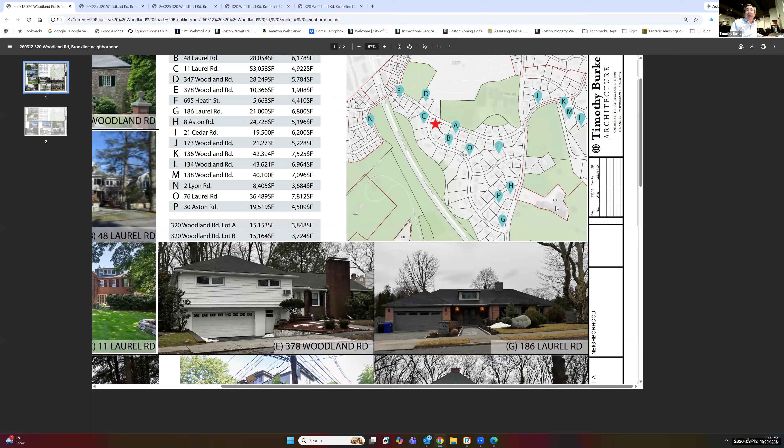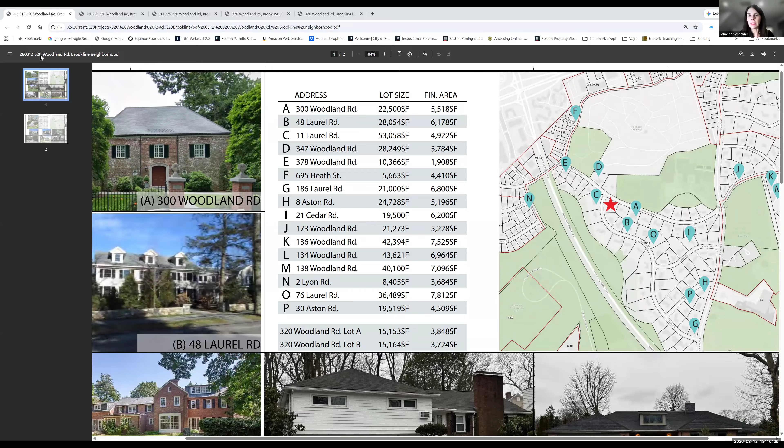I'll share my screen. I've put together, as Bob mentioned, some drawings. Let me do one thing here. All right, you should see on your screen now the neighborhood drawings or photos of neighborhood houses. We see them, but they're very hard to read. I don't know if you can zoom in so that they're full screen. Is that better? Still small. It looks like you're in a sort of preview mode where you're seeing the column on the left. I wonder if there's a full frame option. Yes, here we go. All right, this should be better now. It's still black, nothing came up yet. No, it's the same thing, Tim. Well, it says participants can now see it. Yes, but I think it is still just in that presentation or preview mode so that we can see the little thumbnails on the left-hand side of the screen. But let's not spend a lot of time trying to mess around with that. If you can just zoom in so that we could see a little bit better, that would be great.

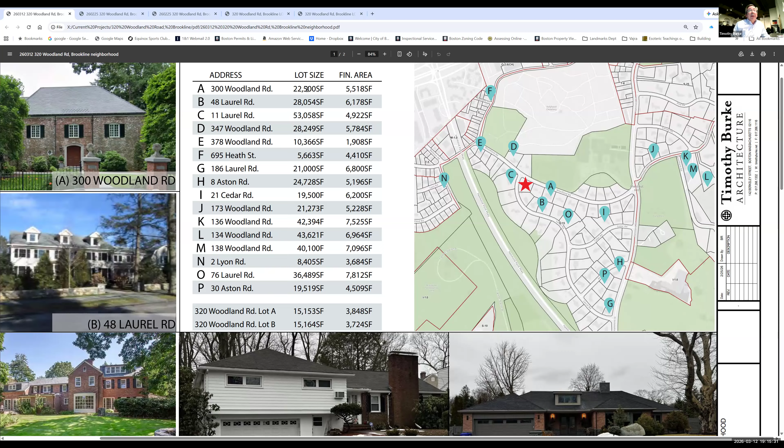So I have here on the right a map that shows the different houses that we've photographed in the neighborhood. The red star is the project site. We've listed the houses and the lot size and the finished area for these houses, with our two houses here at the bottom, just for comparison's sake.

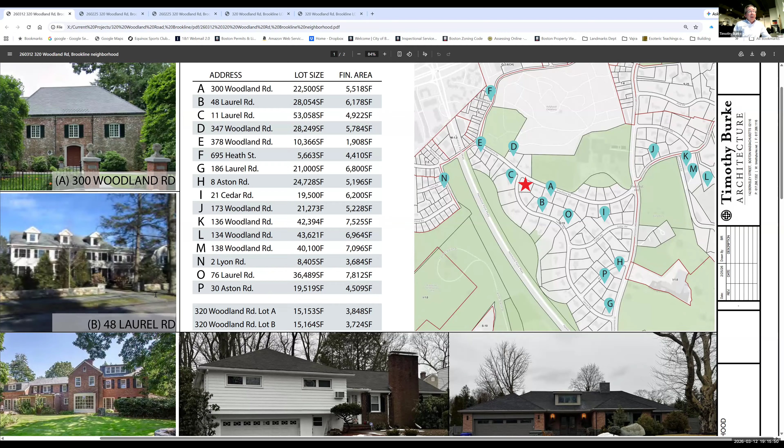And these are some of the photos we did see last time. 300 Woodland Road, which is right here, very close to the site. 48 Laurel is over here on the left. And 11 Laurel, those are also quite close to the site. That's items B and C on the map.

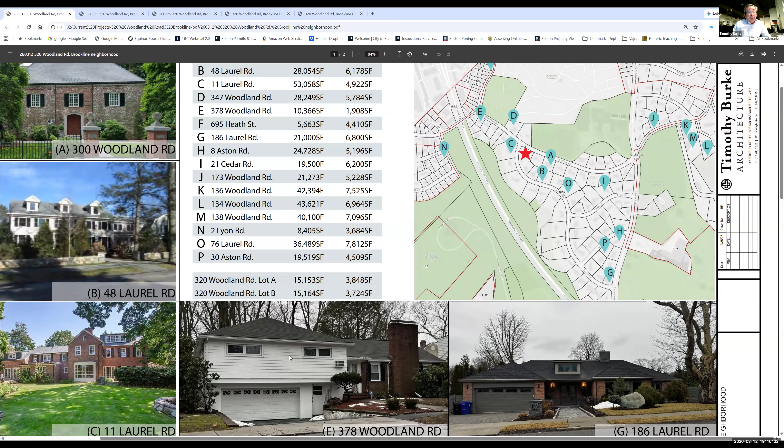And then there's sort of a split level here on Woodland Road and a ranch on Laurel Road. Then the second set we included, there's some sort of modern house at Cedar Road, Tudors on 173 Woodland, and some of the larger kind of more modern, very large houses shown here on Woodland Road and Lyon Road. And this is another one on Aston Road, 30 Aston.

So I think as I studied the neighborhood, what I found was there was quite an assortment of architectural styles. I'd be happy to share with you, I put together, let me just do this here.

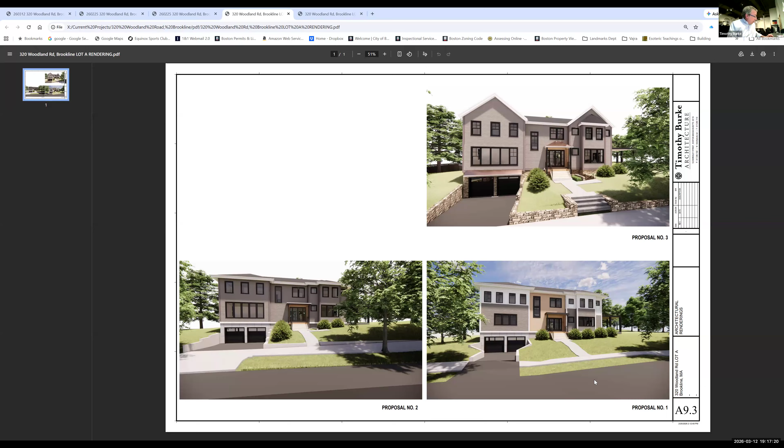So now I put together this would be the Woodland Road property. I have here on the bottom right where we had started with the planning board, and then this was the scheme that came before you after going through the planning board review process.

This is what we're presenting tonight, and I have the detailed drawings as well. By using trusses, we can raise the roof and make it a steeper pitch. I've made it as steep as I can. We've changed the windows to more traditional double hung styles and some picture windows. We've added a stone base to the foundation, so it sits on a masonry plinth, and added some copper details for the roof over the front door. So that was the house on Woodland Road.

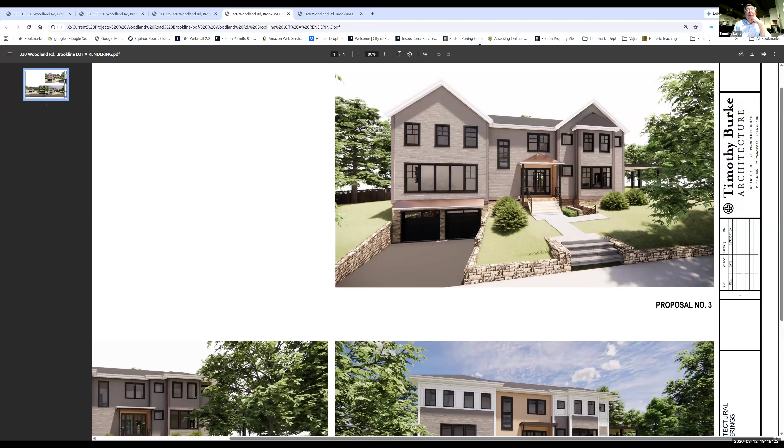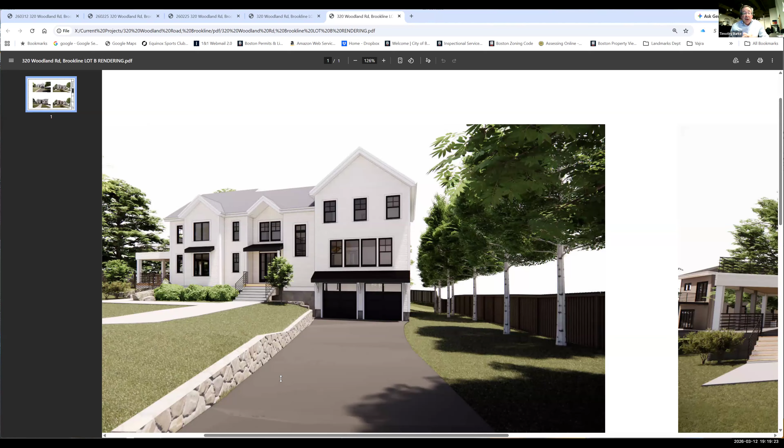And then this is the current scheme, again, with steeper pitched roofs, reduced overhangs, more traditional types of windows, as well as we've added some small roofs over the garage doors, this window here, and the main entry. And again, with adding a stone base as well, which is an element that we saw a lot of in the neighborhood. So that's it, and if you'd like I can show the line drawings of all the elevations, but I think these renderings help to show it best. I'll try to make it bigger here so everyone can see it.

Thank you. Randolph, do you want to see any drawings beyond these renderings? No, thank you. Steve, do you need to see anything else, or are these enough? This is enough, thank you.

Any further questions for Tim? I do not have any. Steve, do you have any questions for Tim? No questions, thank you Tim. Randolph, any questions?

Just one. We had received through staff a one-page document called a neighborhood context study, which had a smaller number of properties. I appreciate the many properties on this presentation, and my only question is: are we stopping here with design, or are you showing that other exhibit as well? That was the one I sent over to you, Tim.

Did you incorporate some of those in? Yes, they were all in that first one there. Oh, it's all been blended in together - tried to keep it simple. That's my fault, that was my office that generated the one you saw today, and I sent it along to Tim, and I wasn't able to merge the two, but he was able to merge it. Yes, I did. Yeah, thank you, that's helpful. I'm all set, Johanna.

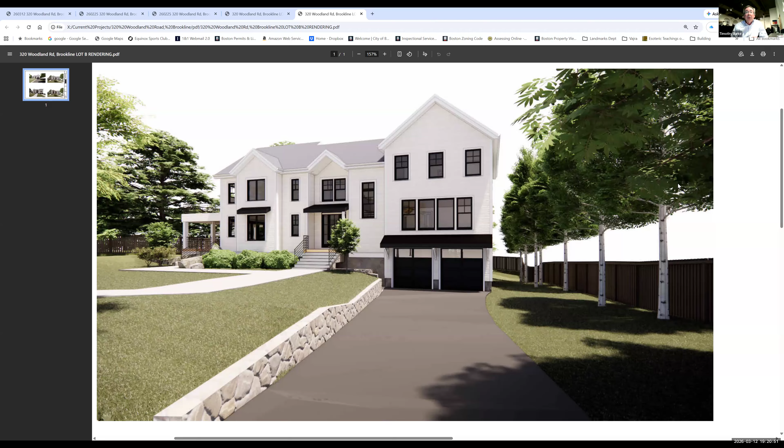No more questions. Okay, Mr. Allen, anything you want to say in summation before we go to public comment? Well, I don't recall where I left off last time, so I just want to make sure that, again, the 905 standards are complied with.

The specific site is an appropriate location for the use. The site is a single family in a single family district. It meets all dimensional setback requirements. The use does not adversely affect the neighborhood. The home will be used as a single family dwelling, as is allowed in the district. In fact, the house immediately next to it on Laurel Road was actually part of this house before and was subdivided some 7 years ago when a new house was built.

There's no nuisance or serious hazard to vehicles or pedestrians. A single family home will have a driveway - as you saw, it's a nice long driveway with a good view corridor, so there shouldn't be any issues. Adequate appropriate facilities will be provided, and there'll be no effect on the supply of housing available for low and moderate income.

I would suggest to you, we're creating an ADU, if you remember, in each of these units, which has been approved by the state and town meeting, and it provides an affordable option for either in-law, nanny, or a renter. So I think that's a great addition to this neighborhood for somebody that may need it in the future. So I suggest to you, we have complied - again, it's very little relief needed, and we hope you'll find in favor.

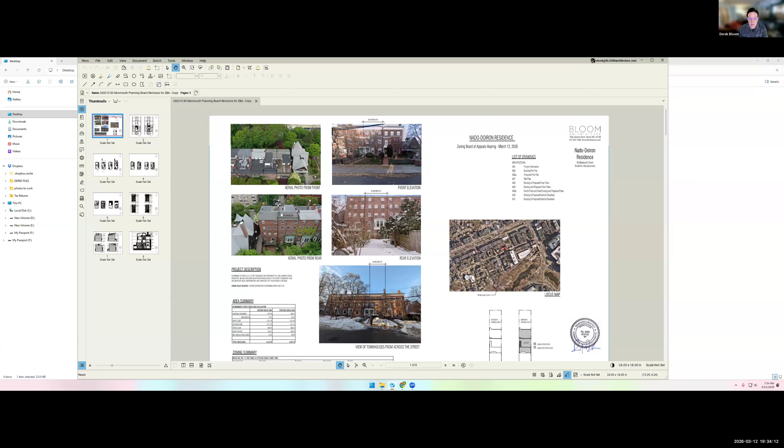Yeah, okay, I'll do the cover just so we can see photos as well, just to familiarize. So this is the street that we're on. This is the front view of the property, if everyone can see this. As Bob mentioned, it's in a row of very similar buildings. And the rear is here, where it picks up an extra story from the slope of the neighborhood.

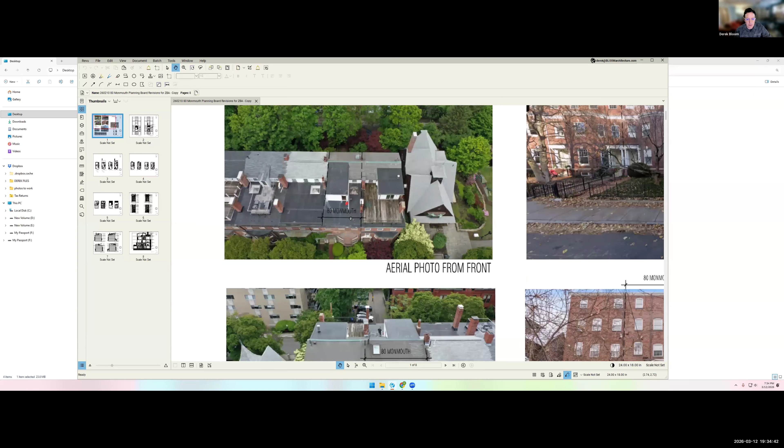So on the rear, we'll be looking at a deck in this location, similar to the one adjacent. And on the roof, we'll be looking at a roof deck here, similar to the adjacent also. Jumping to the plans, sorry, jumping around here.

So on the first floor level, this is the existing floor plan on the left. And the new proposal is to put a deck off of the new kitchen that would extend nearly side to side and level with the neighboring deck, and would have a staircase down, which is to their own garden level and parking out in the back alley.

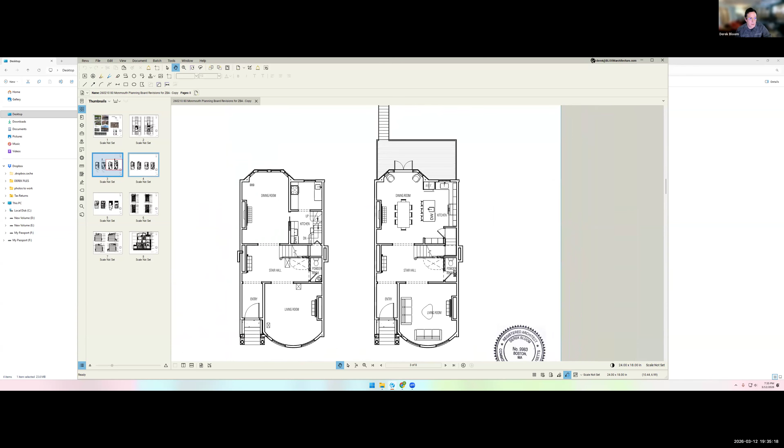On the roof side of things, the current day penthouse occupies this footprint, which is Monmouth on the lower side of the page. So this is the front. This is the penthouse with the skylight. We're proposing to keep the same roof pitch, but pull it back slightly from the street and push it in width, side to side, adding skylights.

The roof deck, as Bob mentioned, we had gone to planning with an adjacency on the chimney side, but we'd been going to the property line on the left side. They had asked us if we could pull it in to make them the same for maintenance and just for visual harmony and distance from the neighbors. We agreed to do that. This dashed line represents the brick facade below, and they were okay with us extending to that plane, not to the roof overhang or gutter out here, but flush with the brick below, if that makes sense.

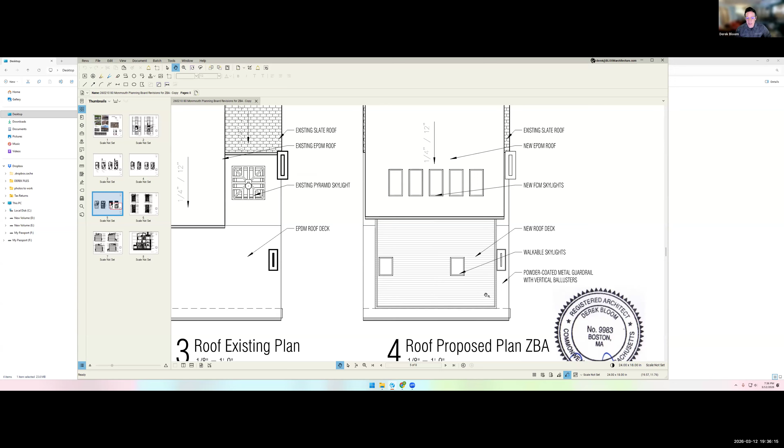So that's a cursory look at it. Let me know if you need any other information.

Members, any questions here? Johanna: No, thank you for that. Steve: No questions, thank you. I have one question, and...

It goes back to the discussion of the relief. Bobby, if you're going to talk about this more, maybe you could answer it there. We've got a planning board report that has the grid in it that says the relief is available for a couple of the items under 543, but I think you said relief was available for everything under section 6. Can you talk about that?

Yes, so all the relief could be granted under section 6. There's two pre-existing nonconformities: FAR and usable open space, which always go together, right? Once we're not in compliance of usable open space and we have too much FAR, once we increase the FAR, we're going to increase the usable open space requirement. So those two can be done under section 6, and then the alteration of a structure with the existing non-conforming height.

So the head house is 48 feet and the maximum height is 35 feet. We're extending that head house, so that's a pre-existing non-conforming condition. Right, and those are the ones that the planning report does call section 6 relief. That's right, that's right. So, and then we propose to increase the...

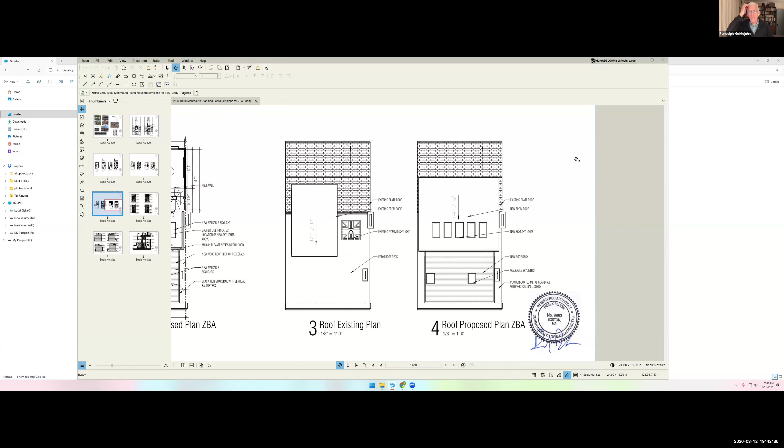Oh, I beg your pardon, I'll recognize Janice Khan. You're all set to unmute. Thank you very much, and I'm sorry to weigh in so late. I just wanted to acknowledge — Janice, sorry to stop you, just give us your name and address. Yep, sorry, Janice Khan, I'm a Town Meeting member in precinct 15.

This is my neighborhood, I live at 63 Craftsland Road, so I am often going by Woodland Road. Janice, I'm just going to stop you, we are on a Monmouth Street case now. Oh, sorry, we've already concluded — I knew right away you were on the other case. Sorry, thanks Randolph, I wasn't able to get on earlier. Okay, I'm sorry about that. Yeah, no, thank you, I'm sorry.

Right, let's see. Okay Cameron, and that was it for possible public comment on 80 Monmouth? Yes. All right, please give us the planning department and planning board reports.

The planning board is supportive of this proposal. The planning board recommends approval of the site plan prepared by George C. Collins, PLS, dated November 25th, 2025, and architectural plans prepared by Derek Bloom, RA, dated December 10th, 2025, subject to the following conditions: 1, prior to the issuance of a building permit, the applicant shall electronically submit final floor plans and elevations stamped and signed by a registered architect, and a final site plan stamped and signed by a registered engineer or land surveyor to the Director for Regulatory Planning or designee for final approval.

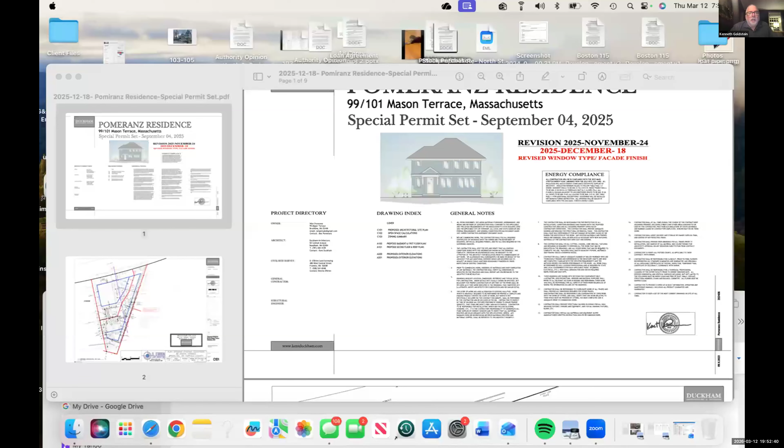Well, I'm going to call up the site plans, and I'm going to have Mr. Duckham walk you through them. Good evening, Kent Duckham, Duckham Architecture and Interiors.

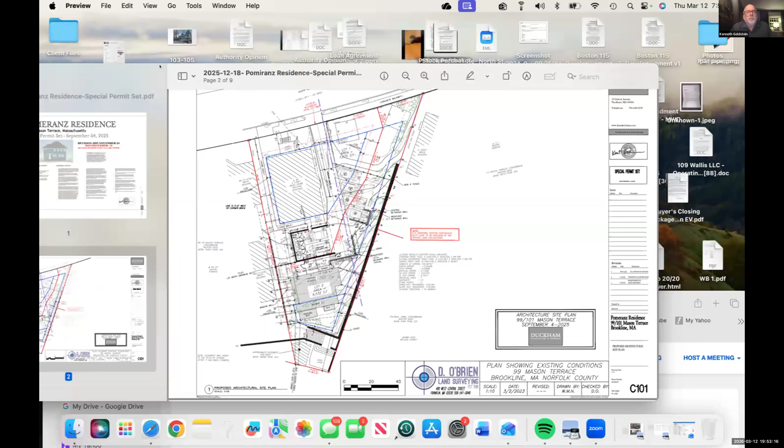You're looking at the proposed site plan that... Just a pause here, is there a way we can see that bigger? Maybe there's a full screen view or something like that. We're seeing your whole desktop. Yeah, let me work on that. How's that? Oh, better. Yes, thank you. You're welcome.

So the site plan shows a red, somewhat zigzaggy line, which is the proposed subdivision of the lot. That subdivision accommodates the access coming from the street and goes back and expands so that there could be potential parking on the rear lot, and then a small building envelope, which is in the dashed blue line, sort of at the...

Ken, just a quick thing—we can see your arrow, your pointer cursor. If you can drag it around, that will help us if you point to things while you talk about them. Yeah, good idea, thank you. Very good, yeah, thank you. Okay, and so then there's a small building lot in the back.

Rear lot is in this case a 30-foot rear yard setback and a 30-foot front yard setback. So we're proposing to reduce the front yard setback from 30 feet to just over 10 feet so that we can get a reasonable footprint for the house.

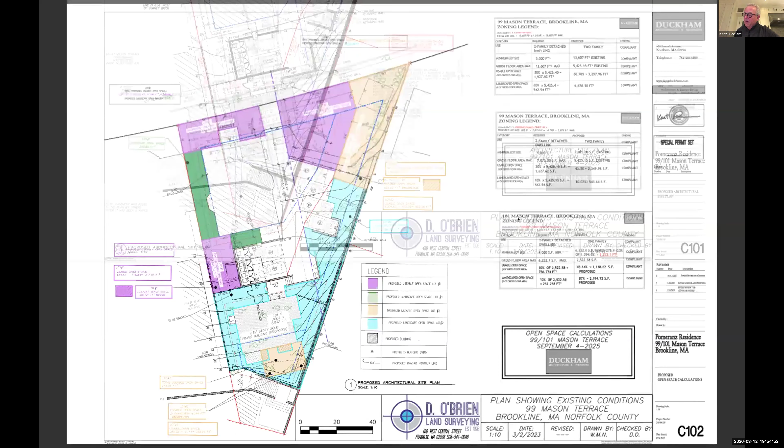The house is 2,522 square feet proposed. The allowable for that lot is 6,253. So it's a modest house relative to what is available, although there's not a lot of room back there. It's a long access to get to the back.

So the house is set into the hill, into the slope, goes down with a walkout area in the back, and you can see some little terrace areas that are sort of hatched in behind the gray portion of that proposed footprint.

So the relief is for reducing the front yard setback for the rear lot. And additionally, it's a kind of family compound. Max's aunt and uncle, nieces, and grandmother live in the front house, and Max and his wife and child would live in the rear house. They're purchasing the lot from their family in order to do it. So I think it's 4 generations of Pomeranz will be there on this property.

They already have roughly 6 parking spots on the property for the existing front house, and they wanted to maintain at least that for the proposed. You can see there's 2 parking spots behind the existing house in front, and then 4 diagonal spaces off to the side. So there's a lot of relief required for those shared spaces because they overlap the lot lines in a number of areas. It was cited at one point that some of that parking was originally in the side yard setback, but we were able to get the last space, the bottom of the diagonal spaces, out of the side yard setback. So that's one less requirement there.

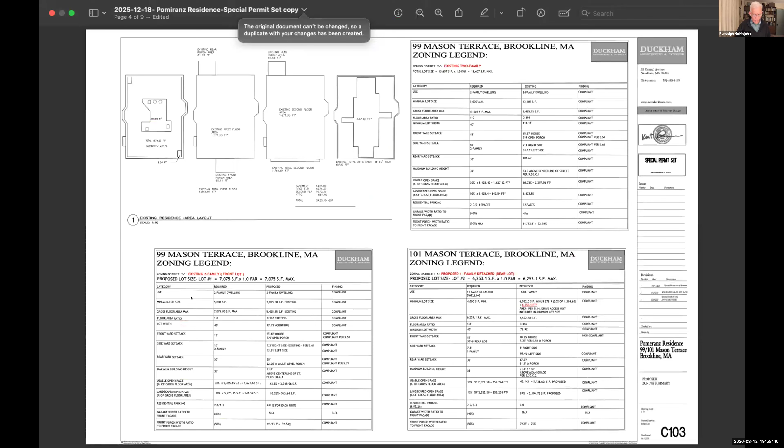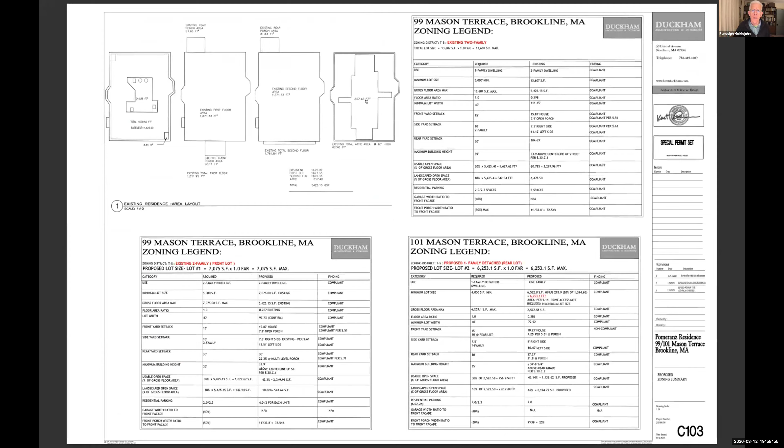Wadner, I'm glad you brought that up because I had a similar question, and I think maybe I was misled. But on the O'Brien land surveying drawing, there's an indication of passageway twice on the site plan. It made me wonder whether the public pathway went up next to the lot, but I think Ken, you're saying that's not what it's doing.

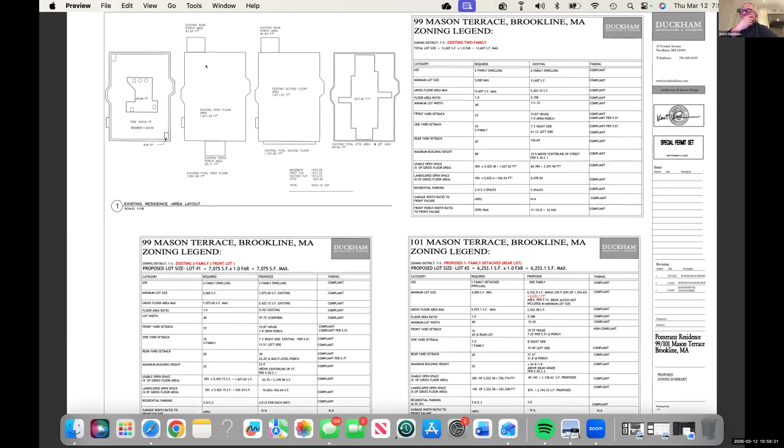I'm trying to get to the back of it. Show that, probably have to scroll up. Yeah, for some reason it's not wanting to scroll anymore. So on the downhill side of the lot, it's on the adjacent property, and then sort of about midway up, it shifts over onto the property. Can we get to that site plan, please, in the main view, the one with all the purple and green and blue, whichever one we can see it on. That's fine. Sorry, I got to ask for the full screen view again without the desktop. Yeah, that's right there. That's better.

Randolph, if you look at the main house in front, to the left of that is that green area. The dotted line there's a line from the property line over about 4 feet before you get to the house. That's the passageway, and it's a public access. Does it have a name? It's not Mason Path, is it?

No, it's baked into the old subdivision of this property, and it's not a path that the town of Brookline has adopted as one of its paths. It's just there. So in practical or clear functional terms, is it open to public access now or no? Well, it is as a practical matter. It's not necessarily as a legal matter. It's not clear who is granted rights to that easement or not. It's an old vestige kind of thing. It's passable though.

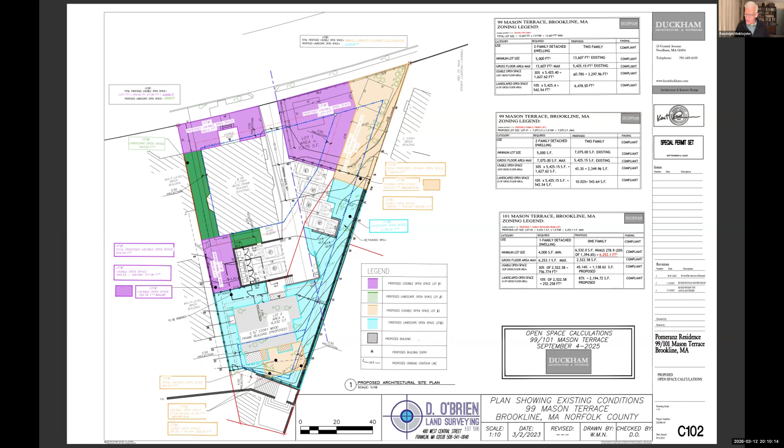All right, let's see if the presenter can take down the site plan drawing. I think we can go to public comment if we have any. Cameron, can you let us know? Are there members of the public present who would like to speak in favor of this project? I don't see any hands raised. And nobody present to speak in opposition? No. All right.

Thank you. Let's have the reports of the planning department and the planning board then. The planning board is supportive of the proposal. The board questioned whether the applicant could move the proposed four parking spaces to not be angled. However, the applicant explained that the proposed parking was the best configuration to allow for the needed parking and to maximize the ease of egress. The board accepted this explanation and approved the plans as presented.

The planning board recommends approval of the site plan prepared by Dennis O'Brien, PLS, dated August 29th, 2025, and the architectural plans prepared by Kent Duckham, last dated December 18th, 2025, subject to the following conditions: 1, prior to the issuance of a building permit, the applicant shall submit a final site plan prepared by a registered engineer or land surveyor, subject to the review and approval of the Director of Regulatory Planning. 2, prior to the issuance of a building permit, the applicant shall submit final floor plans and elevations of the new single-family dwelling prepared by a registered architect, subject to the review and approval of the Director for Regulatory Planning.

3, prior to the issuance of a building permit, an ANR plan indicating parking and driveway easements and in accordance with the site plan shall be submitted to the planning board for endorsement and recorded at the Registry of Deeds. Evidence of the plan's recording shall be submitted to the Director of Regulatory Planning and the Building Commissioner. 4, prior to the issuance of a building permit, evidence of the recording of the parking and common driveway easements at the Registry of Deeds shall be provided to the Director of Regulatory Planning and the Building Commissioner. 5, prior to the issuance of a building permit, the applicant shall electronically submit a final landscape plan, including all retaining wall heights and materials, subject to the review and approval of the Director for Regulatory Planning. The counterbalancing amenities must be executed in accordance with this plan.